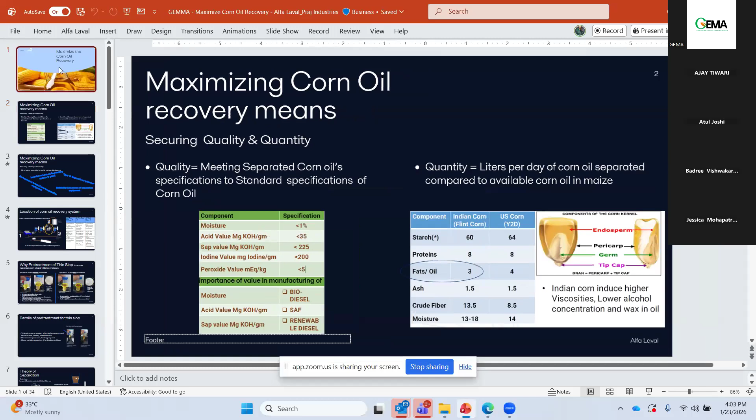Thanks. So today we will be speaking about maximizing corn oil recovery, that's the topic for today. When we say we have to maximize the recovery, it means we have to secure the quality of the oil and also the quantity of the oil. When it comes to quality, it's most important that whatever oil gets separated needs to comply with the global specification of corn oil, such as the various components mentioned here, for example moisture, acid value, Sap value, and so on, with their specification limits being specified.

For example, moisture below 1% is acceptable, and you will also see how important this component is in further processes. For example, moisture is very critical in biodiesel manufacturing, it has to be as low as possible. The same goes for acid value when it comes to SAF manufacturing, and also when you are talking about renewable diesel. These are basically the end uses of corn oil, which is separated in distilleries.

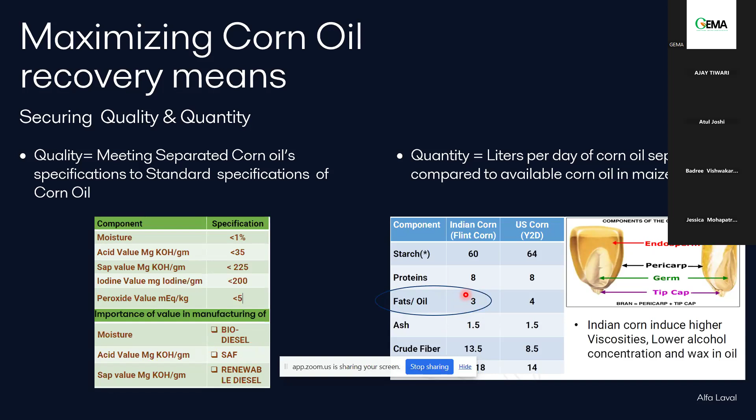There are other factors we also need to consider to secure quality and quantity of corn oil. For example, when we talk about the separation system, which is the best suitable location in the plant where we can put the separating system to recover the oil to the maximum extent possible. The second parameter is whether the oil needs any pretreatment, because given the available corn oil content of around 3% in total crushing of corn per day basis, if we have to separate it out, do we need any pretreatment? Otherwise, we know oil is always kind of hygroscopic in nature.

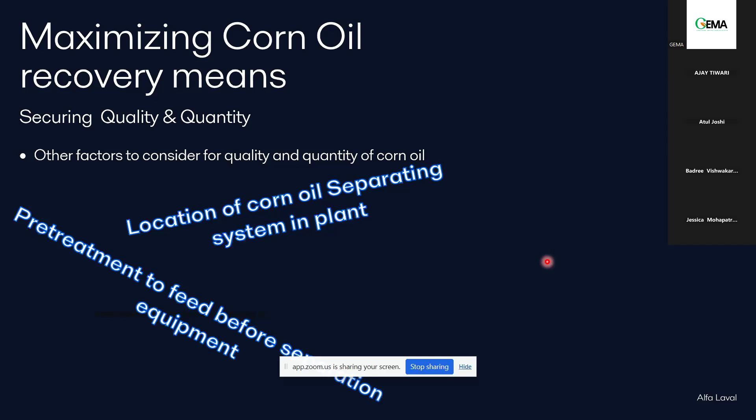They tend to attract moisture and try to start forming emulsions. If emulsions are formed, it is really difficult to separate in a mechanical way. Then you need to go for acid treatments and so on. So we really need to think whether a pre-treatment is required, and this is something I will cover going forward.

It's also important to choose the correct separation equipment. There are various separation equipment and technologies available. Which is the best one we can look for, so that we can maximize recovery, securing the quality as well as quantity. The fourth one is also whatever equipment we select, how reliable it is, and what kind of features it has which help maximize recovery.

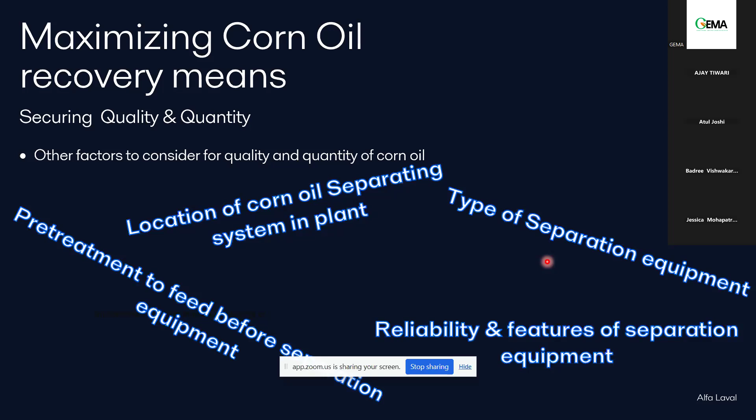This is also important because the plant will run 24 by 7. So equipment also needs to be reliable in terms of its operation, and it should carry certain features which help generate more oil or separate more oil as far as possible. So I will touch on these four parameters in my subsequent slides.

The first one is about location, and I have just drawn this from the whole stillage side. Then we do the dewatering, the DDGS gets formed, and whatever centrate comes out of the decanters goes into an evaporation system, and finally the cake or concentrate goes for the drying process to make DDGS. So separation equipment can be put at these three levels.

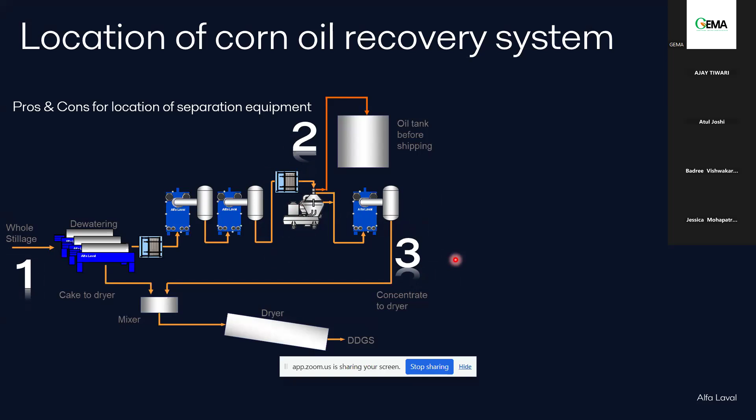You can think of putting it at whole stillage. You can also put it in between the evaporators after the second effect, or you can put it at the end of the evaporators. So these are the locations where one can really try to put the separation equipment. In this table, I have indicated the pros and cons of putting separation equipment at different stages.

At whole stillage, generally the volumes are very high, so the quantity and amount of water and solids are very high. If that is to be handled, you really need a bigger size of equipment, which adds to the capex side of it. At the same time, a lot of solids are also there, and those solids will also increase the viscosity of the feed, and that's where you end up selecting a bigger equipment if you want to separate out the oil at this particular stage.

This is also an area where the solids that come out are somewhat abrasive in nature, which can lead to higher maintenance if we try to put any separating equipment for corn oil at location one, that is at whole stillage.

The second location is about thin slop after the second effect, I would say. It's a relatively low volume because you have evaporated certain water here. Also, since the solid concentration is low, it's a kind of moderate viscosity you will have here, and this is where you can have an optimum size of equipment and optimum capex, because if the viscosity is high, it is difficult for separation, since separation efficiency is inversely proportional to viscosity.

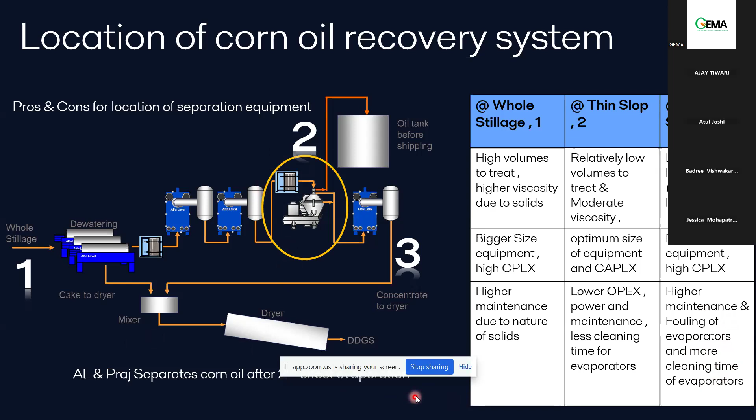Now, as I was talking about the pre-treatment of thin slop, why it is required, I'm trying to show you some of the spin tests we have done on the thin slop, to really see how simple the separation is, or if it's really a difficult one. The spin test for thin slop without pre-treatment was done at different times: 3000 RPM for 2 minutes and 3000 RPM for 4 minutes.

What we saw here is we could not see a clear layer of oil floating at the top in this area. When we checked it under the microscope, we found many small-sized droplets of oil. So the oil particles are very small, and we could not see a clear layer of oil here.

What does it mean? It means there's a kind of weak emulsion phase at the top, and in mechanical separation, separating an emulsion is really a difficult task. Having these small droplets will need a higher force for separation, as well as a higher area of separation. So you end up with a bigger machine, or with the same machine you end up generating a lesser quantity of oil.

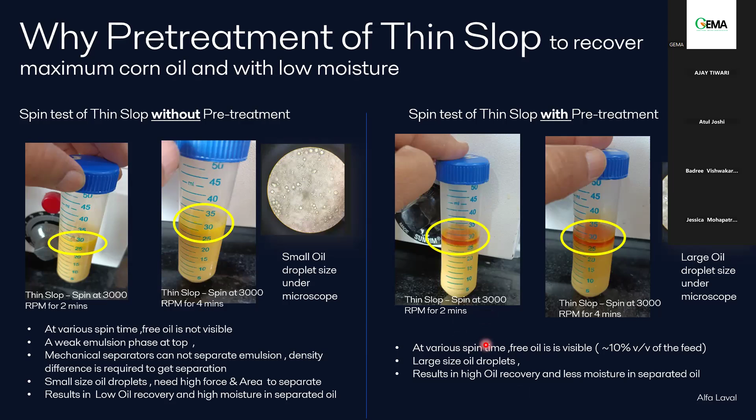What this pre-treatment can be -- it can be a kind of chemical process to break a weak emulsion, which involves reaction time, chemical dosing, etc. It probably also needs to be done at an elevated temperature, since higher temperature lowers the viscosity and gives better separation. So you may need heating, and since the concentrate contains a lot of fibers, it's important those fibers do not come into the separation equipment. So you will probably need some kind of coarse particle separation before it goes into the equipment.

Ajay will really talk in more detail about this, but this is just an overview about pre-treatment that I'm trying to show here.

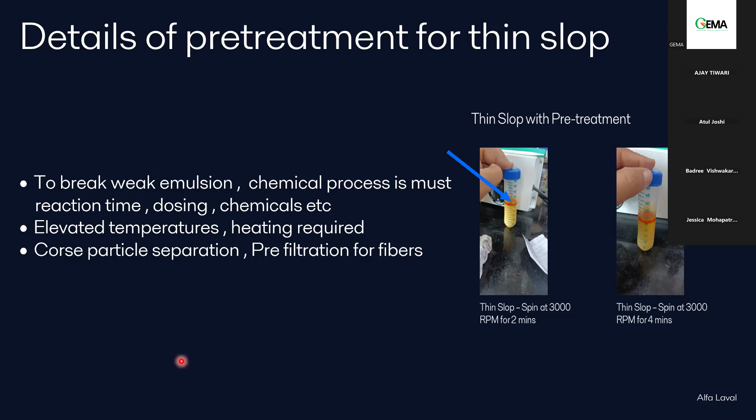So it is called the Stokes law. What it talks about is that the settling velocity the particle will attain is basically a function of particle size, the density difference between the particle and the liquid, and the viscosity. And this entire process happens under the force of gravity.

If you really try to see, it says that if the particle size is bigger, then the settling velocity will be higher, so the separation efficiency will be better. Same goes with density difference: if there is a greater density difference between liquid and solid, the settling velocity will be higher and the separation efficiency will be better. But it is inversely proportional to viscosity, as I was talking about.

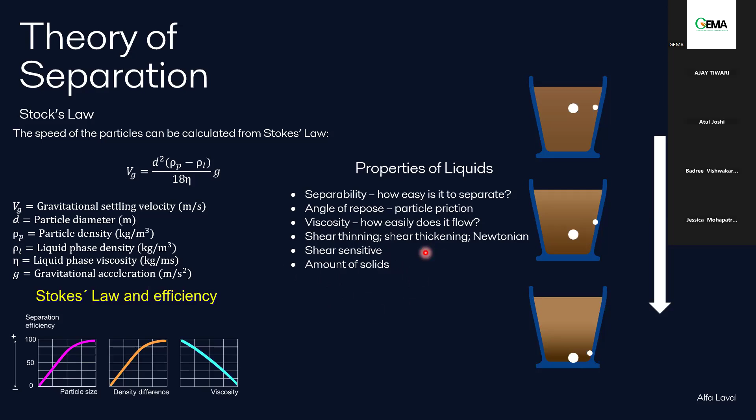Then we'll also have to see whether these particles are shear thinning or shear thickening, or Newtonian like water. You apply any force and water will absorb that and form a shape accordingly. Corn is generally kind of shear thinning - if you apply force onto the particle, they will try to move towards the flow or along with the water, it can come out. So those are shear thinning in nature, the corn particles. And you also need to know what amount of solids is present. So all these properties also have to be considered while selecting the equipment.

But if, let's say, we are talking about particles close to 500 microns, and the percentage close to 20 to 25%, then high speed separators become a perfect fit. And beyond that, if the particles are really bigger and also more in volume, then decanters or tricanters can be used.

One has to understand that a high speed separator has high G-force as well as high area for separation available, compared to a decanter or tricanter, which rotate at a lower RPM, so they have a lower G-force, and also the area equivalent is low in that. So this is something very important to understand while selecting equipment for separation purposes.

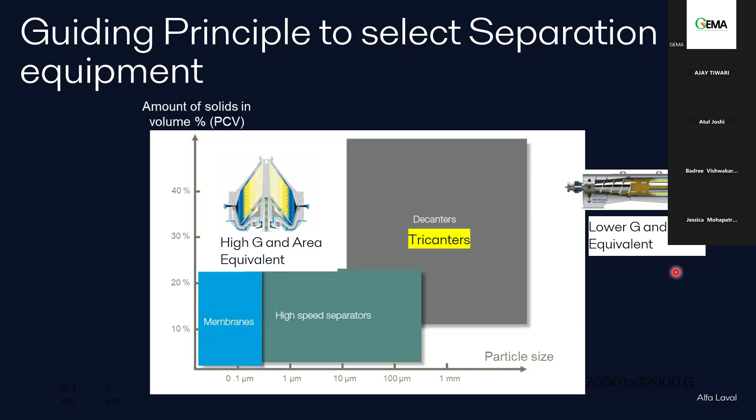Then another important fact is that, suppose one decides to go with a high speed separator, it is also important which configuration of a high speed separator is good. For example, there are three types of bowl in high-speed separators available.

The first one is a clarifier, where there will be one inlet and one outlet. That means it is only used for separating the particles from the liquid.

Another one is the purifier, where there will be one inlet and two outlets - two outlets would be necessary for the liquids, one being the lighter liquid and another the heavy liquid. But here the light phase is dominant. For example, if you want to separate water from oil, you go with the purifier, because the oil is more in volume and the water is less. So that's the purifier application.

And then the third one is a concentrator type of machine or bowl, where again two liquids will be separated and also the solids will be separated. But here the heavy phase dominates - for example, exactly the corn oil application, I would say, or another application just for understanding.

If you want to skim the cream from the milk, concentrator machines are used, where you have one inlet and two outlets, where the light phase is low in volume and heavy phase is more in volume. And this is exactly what happens in corn oil separation, where the water and solid phase is more in volume, whereas the oil layer is very less in volume.

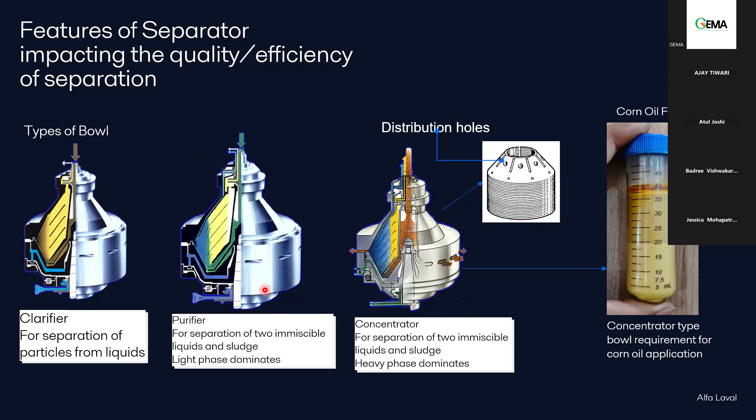It's also important how the separated liquid is coming out, because we are separating oil and we'll have to see at what quality. One, we do the pre-treatment where we make it easy for separation, and then in the equipment where we are separating, we have to ensure clarity between the two phases, water phase and oil phase. And there are two options available.

So this is one option available, where both outlets, oil as well as water, will come out at certain pressure, and you can transport it directly to a tank location. But the disadvantage in this system is...

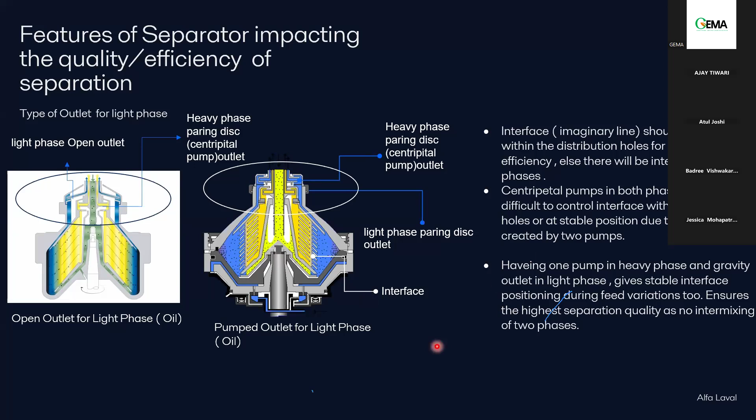This is also a very important feature when you select any separation equipment, specifically when you decide to go with a high-speed separator. When it comes to Alfa Laval, generally the AFPX 200 separation system as a concentrator is what we supply for corn oil separation. It has a concentrator type bowl with gravity, with an open outlet for oil. It comes as a modular design, easy for installation. It's an intermittent discharge type, rotates at 7188 RPM, has an area close to 52,000 square meters, and the installed motor is close to 22 kilowatts.

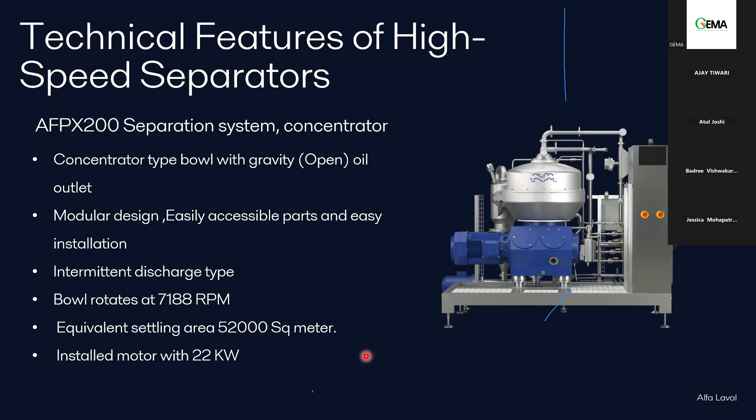So this is all about the equipment, and now I'll talk a little bit about our capabilities on the service side as Alfa Laval. We have the entire ecosystem available in India.

We have sales and service support teams. We have some partners who handle certain products. We have claim support teams here. We have the parts distribution center in Pune. We also have a team available during the day for supporting customers remotely, providing remote guidance. We have on-site engineers to deliver our services. And we also have 3 service centers located all across India. So this is the ecosystem we have.

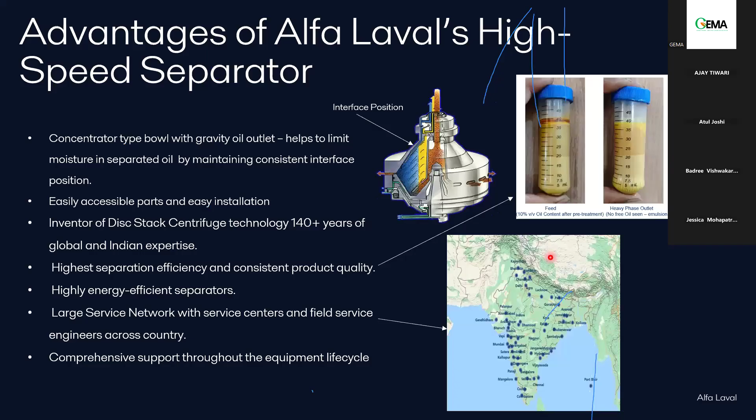You can see we have more than 85 service engineers at different locations, covering the install base so engineers can reach it as quickly as possible. We can help our customers during startup and during operation of the equipment. If customers need any optimization, we can be there. And if there's any renewal or change in process, if something needs to be modified in the machine, we can do that too. So we have a full ecosystem available with us.

This is what I thought of talking about. And when we were talking about having a high-speed separator and also a pre-treatment system, I think Alfa Laval and Praj have combinedly developed a kind of solution which helps to maximize recovery, securing both the quality and the maximum quantity. I will request Ajay to take the further things. Over to you, Ajay.

I think once we are complete, then we can take any questions and answer them. I hope that is okay with you all.

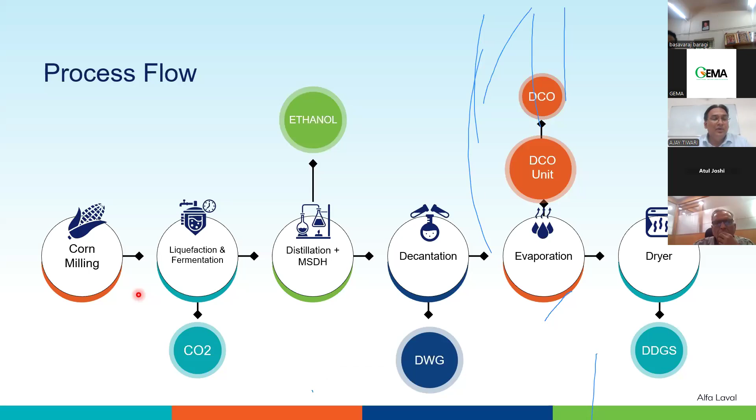Atul, my request will be just to move on the slide as and when I say next slide. I will do that, Ajay.

Until now we got to know the detail of how extraction helps us recover oil in the corn oil extraction process. But actually, if you see the solution we are offering, it's along with pre-treatment. I'll run through some detail on the pre-treatment part, just like how oil helps us extract the oil from the solution. Pre-treatment is what helps us liberate the oil from the mixture, because as we are all aware, in the corn to ethanol process,

when the corn is crushed, oil is released out of the germ, and during the process of liquefaction and fermentation, due to a certain temperature profile, most of the oil that's released gets bound into the small particles of fibers and protein. So this oil has to be liberated so that once we send it to the extraction unit, we get a better, higher recovery.

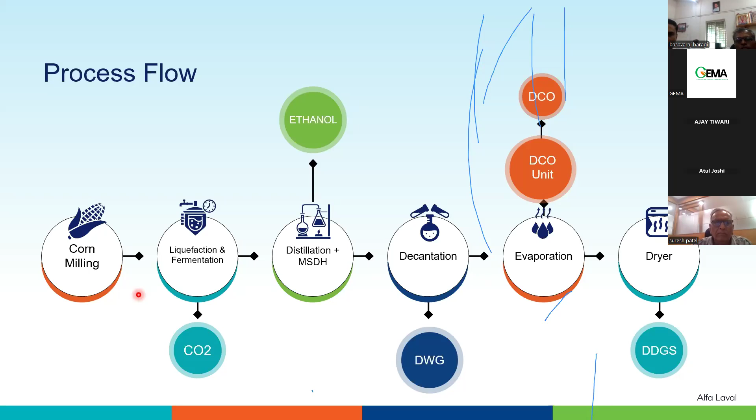I think this I've explained. I'll move to the next one. As you can see, I'll add something on that slide.

Going back to the previous slide, you can see the difference between the process run without pre-treatment and the process run after pre-treatment. In the pre-treatment part, we carry out two important stages. One is thermal treatment, where we raise the temperature of the syrup going into the DCO to a certain level, ensuring viscosity is reduced, and once viscosity is reduced, the oil is liberated.

This is followed by the chemical treatment part, because even after the oil is released, we need the separator to work better, which happens with higher molecule sizes. So in the chemical treatment, we carry out coalescence, coagulating smaller oil droplets into bigger molecules. Once bigger molecules are formed, separation efficiency is highly increased, which helps increase the efficiency of recovery.

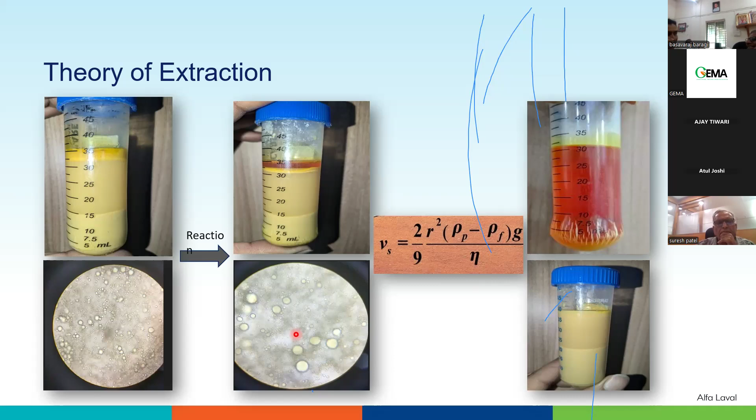As a complete package, what we are offering - the first part is syrup conditioning. We take the tapping from the evaporation plant, effect 4, and since the syrup has to pass through various critical equipment, we protect it at various stages. Before syrup heating, we have an automatic brush filter to restrict particle sizes, then syrup heating is done, where temperature is raised to roughly 80 to 90 degrees Celsius to liberate oil and reduce viscosity.

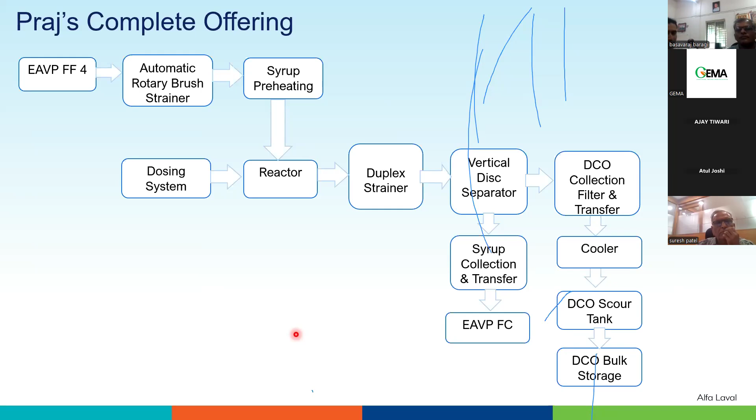Once the temperature is achieved, we send it to the reactor. This part covers the syrup conditioning part, where oil is released.

Once oil is released, there is the second part of pre-treatment, chemical treatment. A certain dosage of surfactants, called de-emulsifiers, is added. These de-emulsifiers help bring smaller oil molecules together to form bigger molecules, with residence time provided for better globule formation.

Once chemical treatment is done, it is sent to the extraction part, which Atul has already explained. We make sure that for better extraction, we handle what's required - reducing viscosity, liberating oil, and coalescing smaller oil molecules.

Those things are performed in the pre-treatment part. Once pre-treatment is done, extraction - as Atul explained - gives us much better recovery than without pre-treatment. The process is then followed by syrup polishing, oil polishing, and storage.

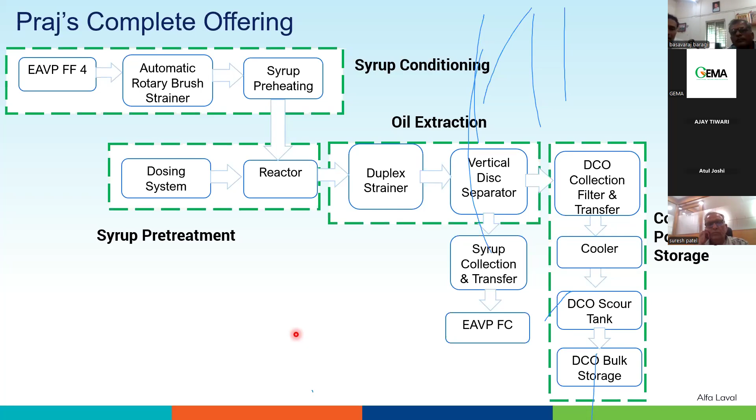During optimization of pre-treatment, since corn is crushed during milling and goes through liquefaction and fermentation, some soluble wax might be released. At the pre-treatment level, during the thermal heating part, there's a chance that to increase oil release, some wax might also be released. But during commissioning, we find a sweet spot where temperature is optimized for maximum oil release with minimal wax release.

As a safeguard, since some buyers, especially for biodiesel application, want wax at a minimum, we use polishing tanks - essentially sedimentation tanks with a special design called a scour tank. In the scour tank, oil is stored for certain intervals, allowing wax to settle down and then be removed. The wax quantity is very minute, hardly grams - basically milligrams.

But those things do affect the pricing of your oil, so that is also taken care of during the solution. Finally, once the oil is cooled and wax is removed, it is sent to product storage, just like our PESO storage or ENA storage - simply a storage tank. Next slide, please.

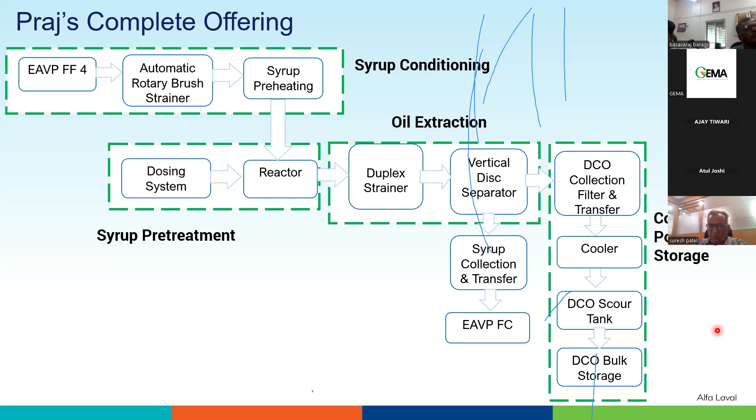So these are some of the studies what we have found. Optimization of temperature is very important, otherwise the coloring, DDGS coloration might get affected. What we have found is around 80 to 90 degrees Celsius for Indian corn during our trial.

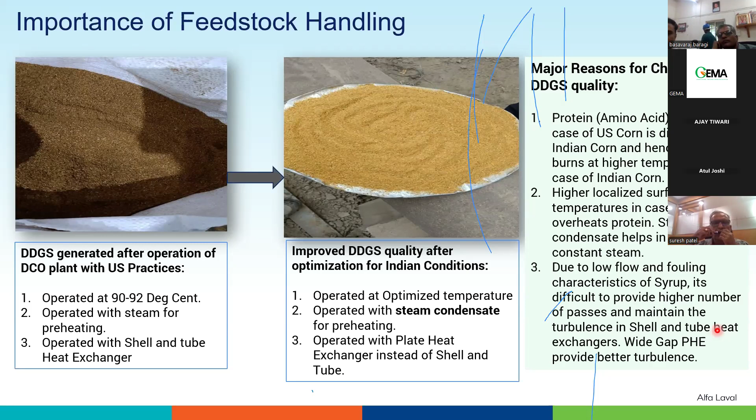These are some of the engineering aspects studied during the trial. One was that we need to have a rotary automatic filter so as to avoid any choking during the syrup conditioning stage, since the chances of scaling are very high due to this solid. We also did trials with both heaters, and the best way possible is to go with the wide gap PHE, because in the wide gap PHE we can have a number of passes so as to have better turbulence, and it avoids the charring effect. So temperature is also raised, but at the same time at a lower temperature we can get a better effect with number of passes.

So we have firmed up the design that we will be having a wide gap PHE for the design.

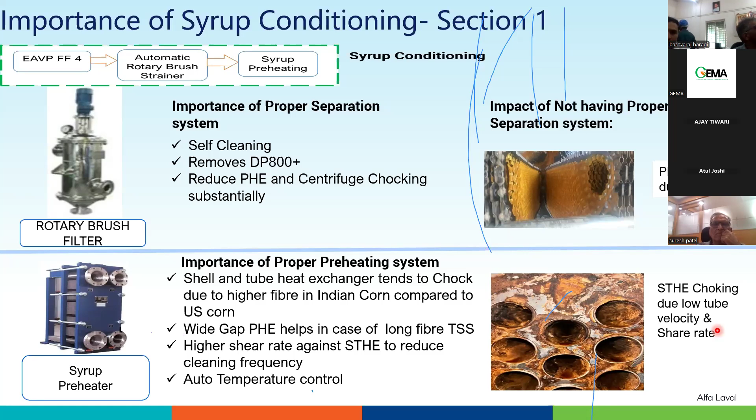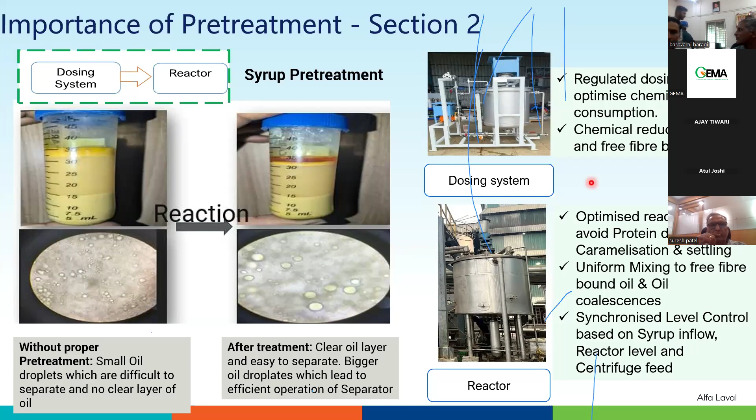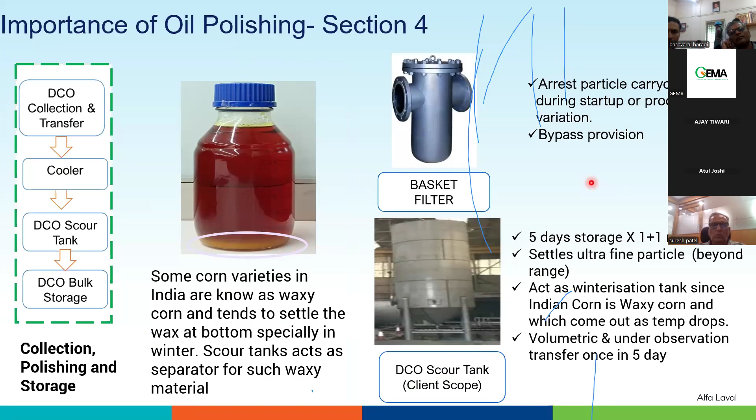Next slide please. Like basically, yeah Atul. Yeah, this is next slide please. Yeah, you are seeing section 2, right? Hello, next slide. Yeah, I think this is already covered, we can move to next. Okay great. Yeah, you can move to next slide. Okay. Is this the one, Ajay? Yeah Atul, please move to the next slide. That's the trial ones, right? Hello, Ajay. Hello, Ajay. Am I audible to others? Yes sir, you are audible to others. I think there must be some technical issues from the second speaker side, so he left. Okay. Maybe we wait. Disconnected.

Yeah Ajay. Sir, he's back. Yeah, am I audible? Yeah sir, you are audible. Ajay, you are audible.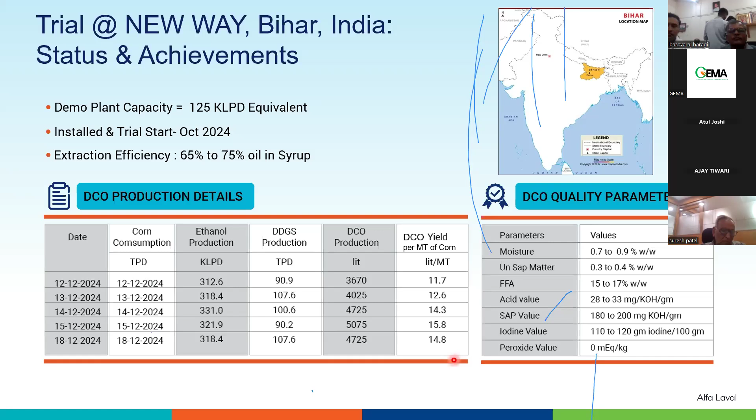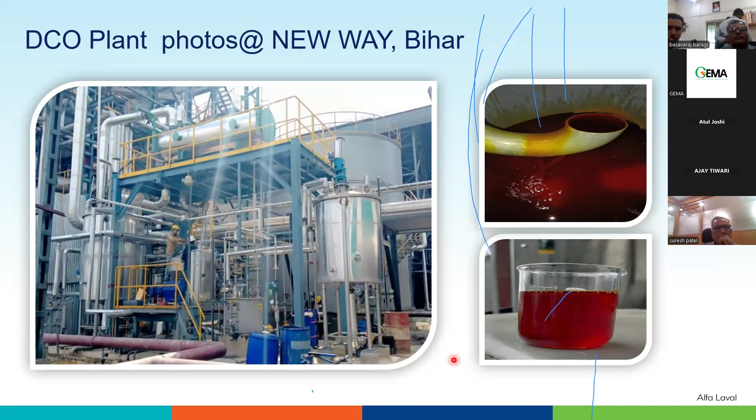These are some of the samples. Some of the key features we have, since this trial has been conducted on Indian corn, we have parameters established. As we discussed about the importance of pre-treatment, the profitability increases along with pre-treatment and the better design of extractor. It can be a plug and play design, like we can design the plant at our workshop and with minimum shutdown, integrate it into the existing distillery.

One thing is also observed that since most of the buyers till date were looking for protein percentage, what happens once we recover the oil is that the protein percentage, in absolute terms, actually increases. Some nutritionists find low fat DDGS with oil recovery as a better feature. So that is also improved. That is one of the advantages we find.

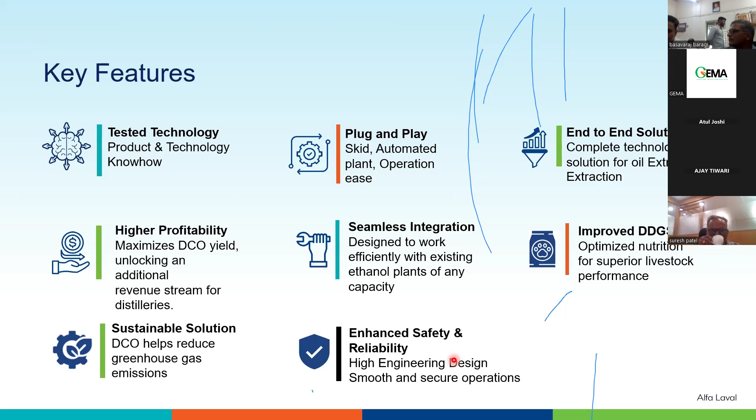As far as utility requirement goes, since we are carrying out thermal treatment during our process, instead of steam, we are using steam condensate. That ensures very delicate heating up of the syrup instead of using steam, wherein charring is possible. Within the plant, whether from evaporation or distillation, the same condensate can be used as the heating media. Power requirement for a single separator will be hardly 50 to 60 kilowatt per hour. That is the requirement of the utility.

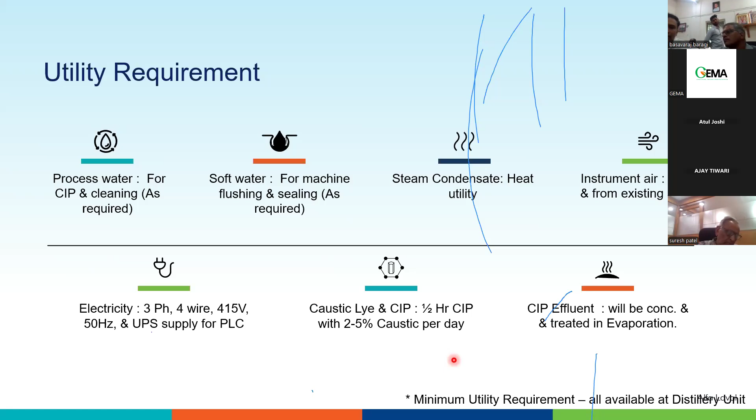These are the different models of DCO which we have standardized based on capacity. Up to 125 plus minus 10%, we have model DCO S, basically with one separator. Once we go beyond 125, up to 250 KLPD, we have a two separator design, and the reactors and other design will vary accordingly, the sizes will vary accordingly. So these are the various models we have, and we can design the plant up to 625 KLPD. In fact, we have references varying from 125 even up to 625 KLPD.

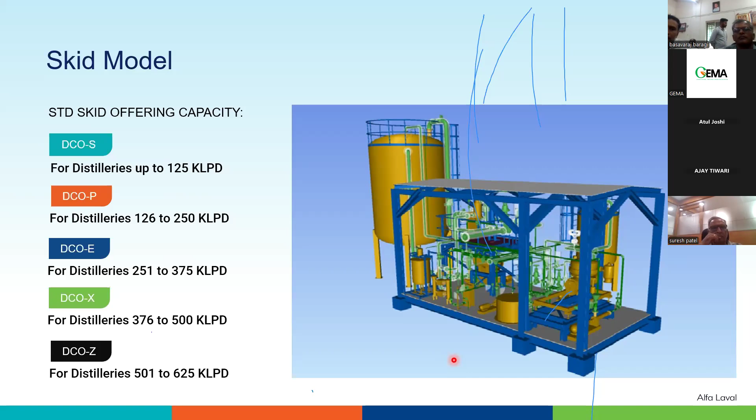These are some of the advantages, the long-term advantage. Since we have already done the study, there is no trial and error method required. We are aware of the basic parameters required and the importance of various sections in the DCO plant. That advantage we can pass on to you as a long-term benefit. Plus we are also working on further value addition of this DCO, which can be one advantage while associating with Alfa Laval and Praj. We are working on a value added product wherein this DCO can be used for further better application, which will fetch you a good price.

Short-term advantage: the skid mounting design helps us reduce our time at site, so that can be a better option to go for. When it comes to establishing the market arrangement, we have certain buyers available who are ready to buy corn oil at very lucrative rates, ranging from 65 to as high as 80 rupees a kg. Two to three buyers have approached us for buyback of this oil wherever Praj Alfa Laval has a solution.

The question is, are you interested in maximizing your corn oil recovery? I request everyone to give their input.